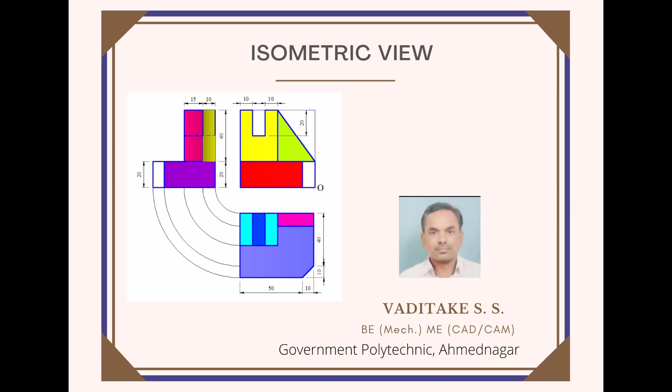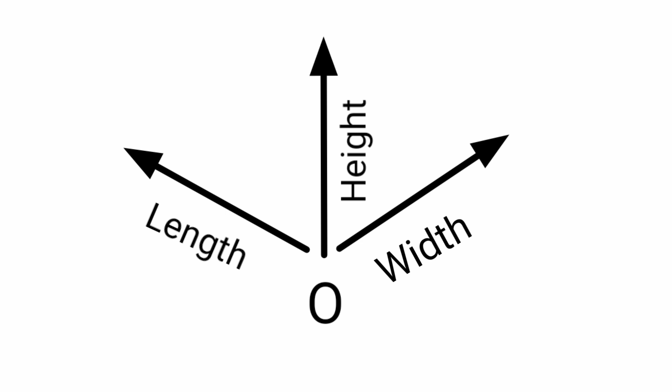Now we learn how to draw isometric view. Observe carefully given 2D views. Observe its origin. Trace out its length, height and width, which is a 60, the height, width is a 50. Now mark origin O, and through this origin O mark height in vertical direction, length toward the left side and width toward the right side.

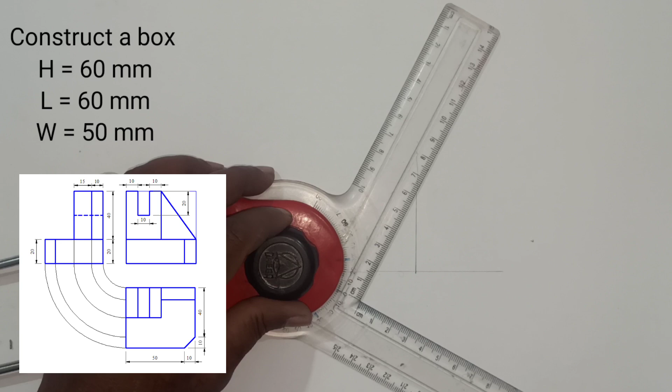After tracing the dimensions, we have to prepare a box. Draw a height of 60 millimeter. Then set an angle of 30 degree with respect to horizontal line and draw this line of 60 millimeter, which will indicate the length. Again set an angle of 30 degree and along the width draw line of 50 millimeter,

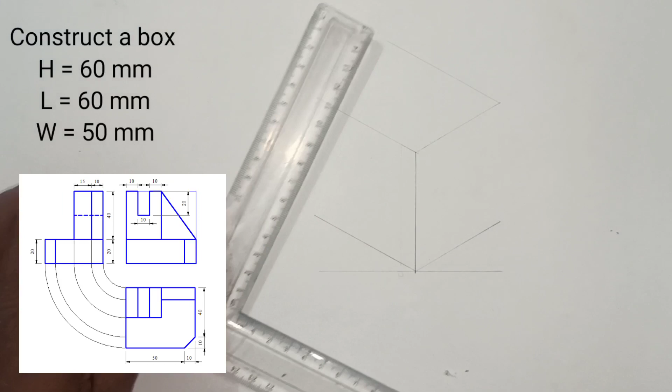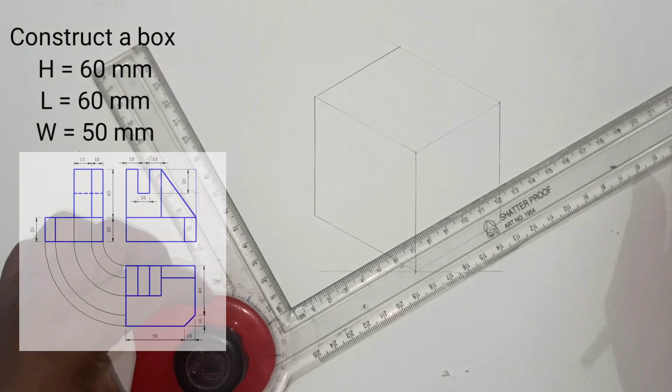and by using the mini drafter just draw the parallel line parallel to the length. Now draw this line parallel to the height. Now draw a line parallel to the width, that is 50 millimeter, and thus by using the mini drafter we can construct a box.

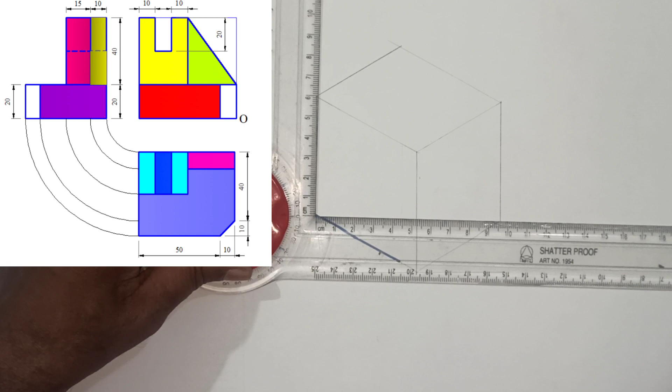Now we have to draw the isometric views. Consider the red color surface which is visible in front of you. So draw this line of 50 millimeter length and a height of 20 millimeter. So draw this line parallel to the height of 20 millimeter by using the mini drafter. Then complete this rectangle drawing a line parallel to the length.

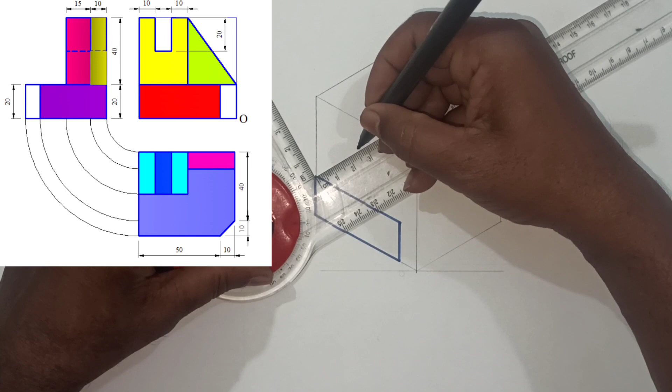Now we have to draw this yellow color surface which is visible in front of you. The position of this yellow surface from red surface is 25 millimeter towards the back side. Now draw this height of 40 millimeter for this yellow color surface.

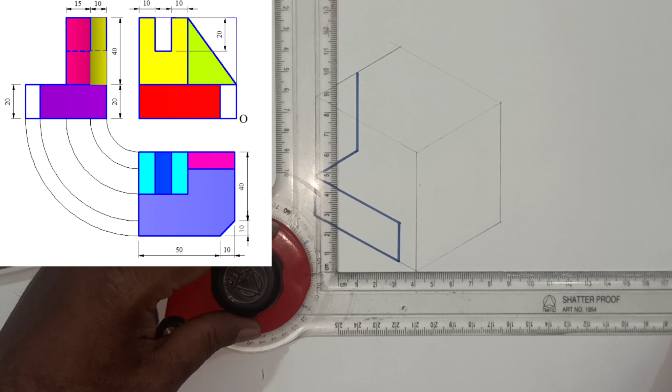In isometric view, we are just drawing the lines parallel to the length, parallel to the height, or parallel to the width. Just simple combination of these different lines gives us an isometric view. Now try to complete the top portion of this yellow color surface. Means draw this line of 10 millimeter. Leave the space or a gap of 10 millimeter.

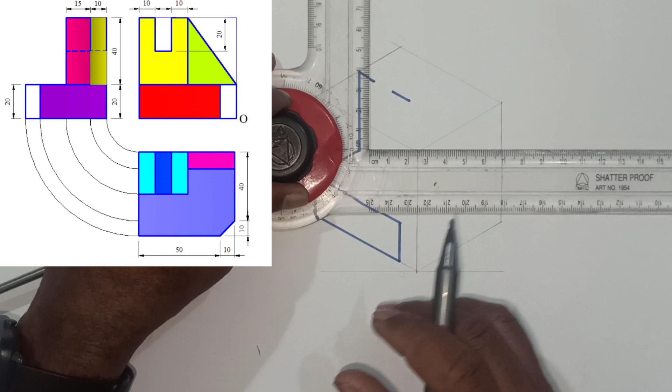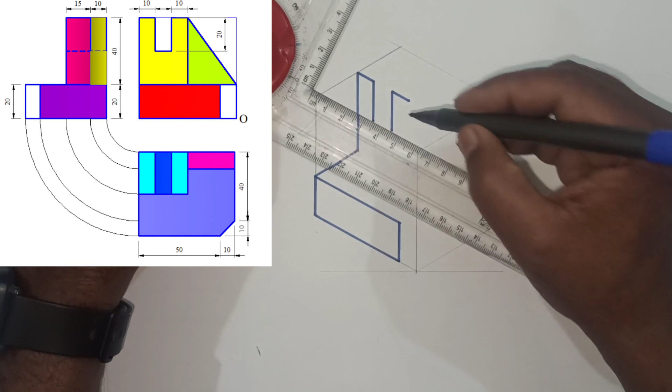Now draw these lines of a depth 20 millimeter parallel to the height. Draw this line of 20 millimeter. Join these two lines by line which is parallel to the length. Now draw this line of 30 millimeter, and through this draw a vertical line. Thus yellow color surface in isometric mode is presented.

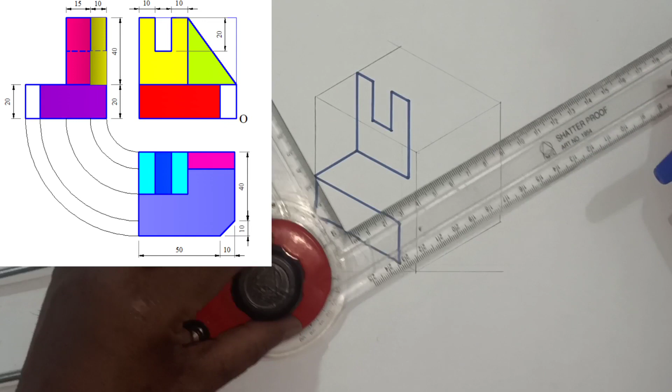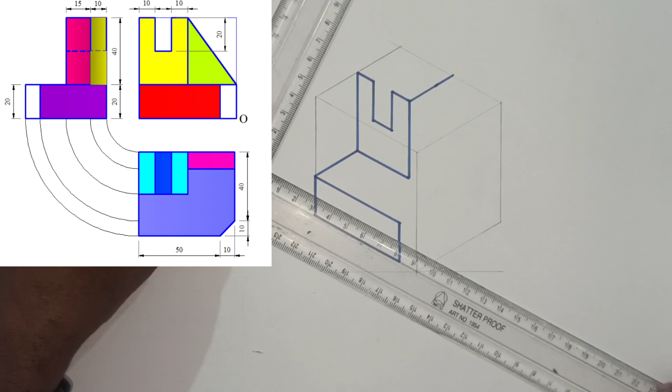So we have to draw this green color tapered surface. Draw this line of 15 millimeter. Mark the point 10 millimeter. Now draw a line parallel to the width.

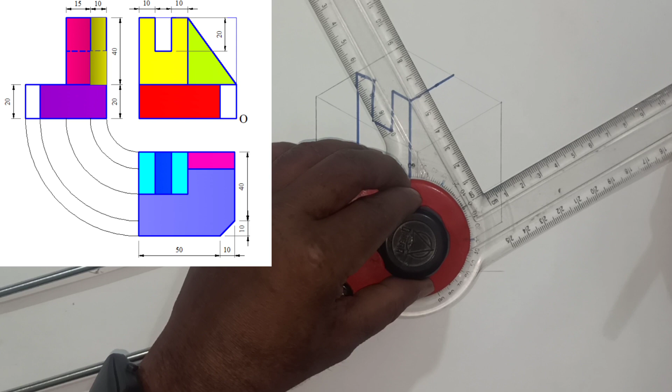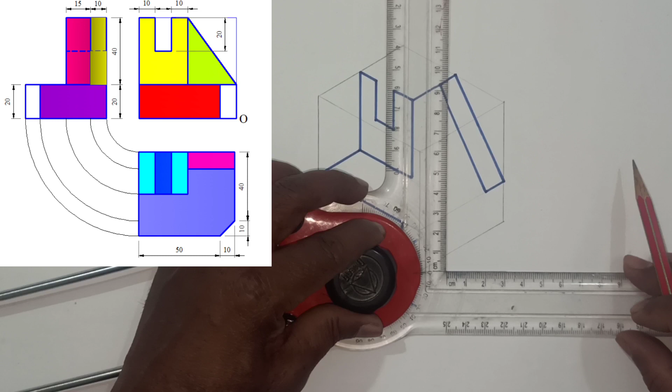Now we have to draw this tapered surface which is clearly visible in front view. So join these, draw these lines parallel to each other. So for this tapered surface, draw a vertical line parallel to the height. This line is of 40 millimeter height.

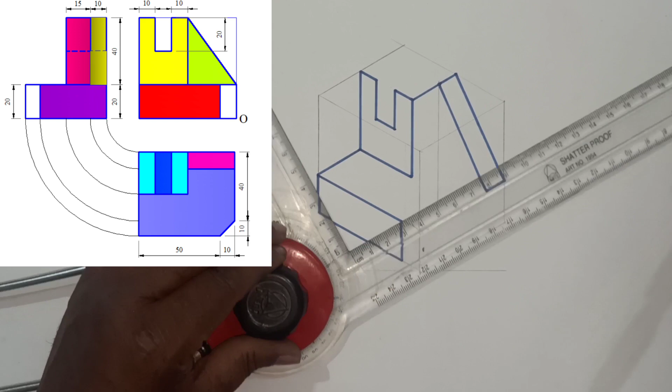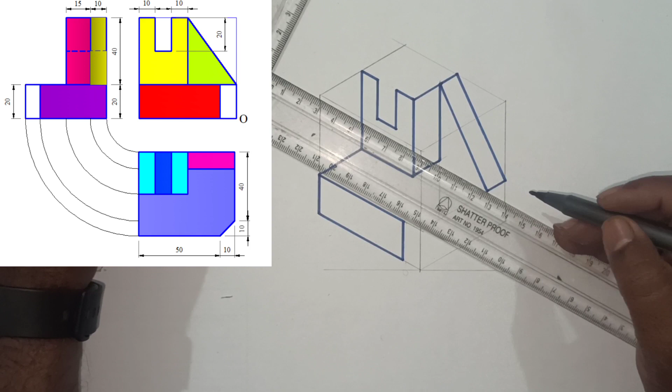Or simply we can draw it by the intersection of two lines. So the intersection of these two lines helps us to complete this tapered green color surface. Draw this height which is of 40 millimeter. Now complete the length of this tapered surface, simply joining these 2 points. This line is of a length 30 millimeter and it should be parallel to the initial length.

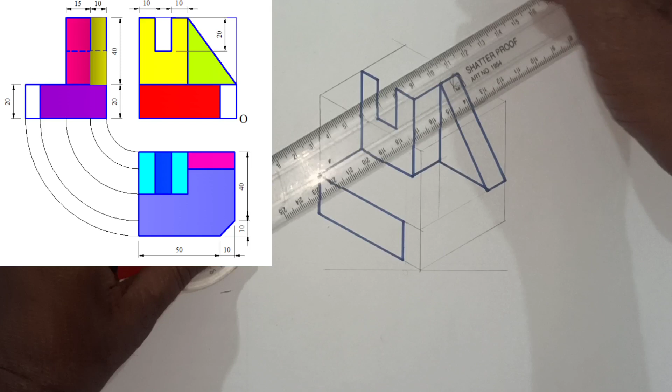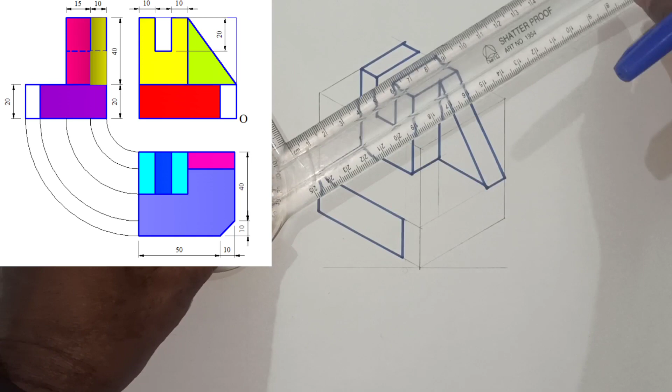Now just draw the lines parallel to the width so that we can complete this top surface. The edges of the slot, one is parallel to the width and another is parallel to the height.

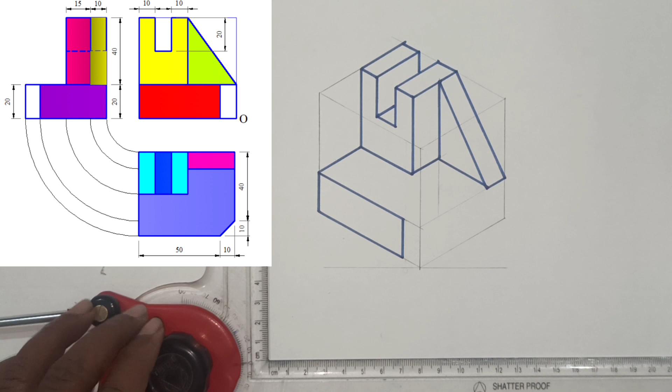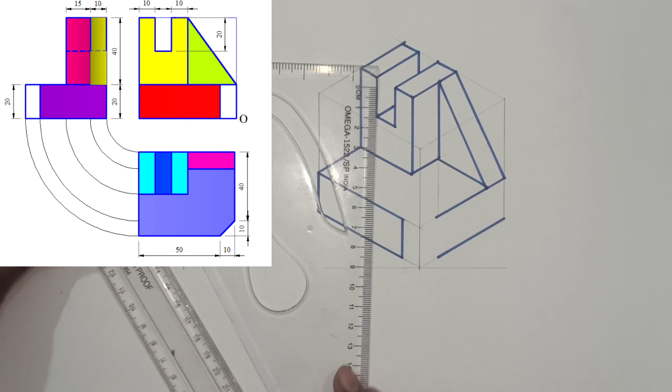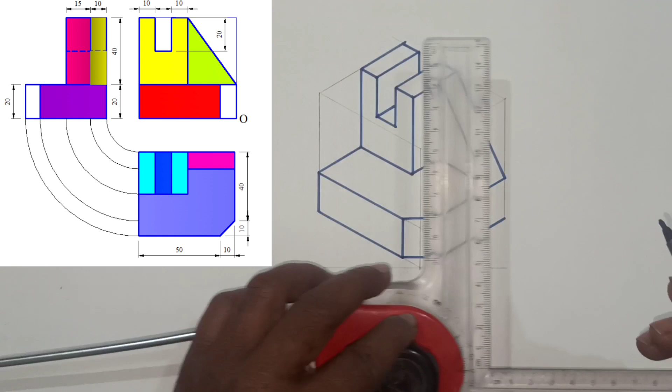Now draw this line of 40 millimeter length, because at this corner we have to show another surface which is a tapered or a non-isometric surface. Draw this vertical line and join these 2 lines by a horizontal line. Thus in this way this non-isometric surface is shown here. Retain all construction lines.